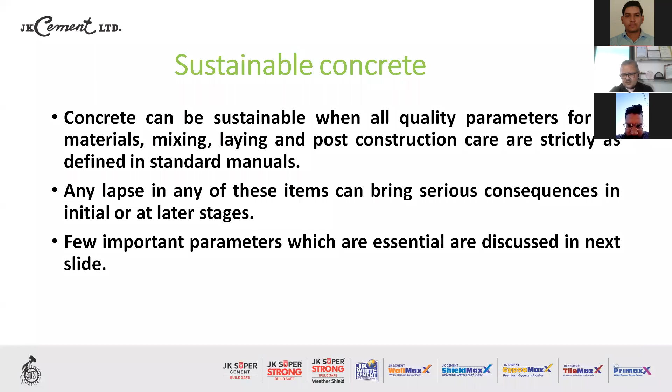What is sustainable concrete? Concrete can be sustainable when all quality factors of material, mixing, and post-construction care are taken care of as per standard manuals. Yes, that's good - that makes good quality concrete. But to make it sustainable, I have a few more points to say. Any lapse in these things normally leads to serious consequences even if the concrete performs well. But what makes concrete sustainable? We have seen construction companies making concrete workable, flowable, with early strength or delayed strength, and a few more things. But are we yet to see the sustainable parameter for that? I think let us move to the next point.

Sustainability comes along with these things: alkalinity of concrete must be maintained for a long time, at least up to its curing period, which is normally for 5 years. Alkalinity must be maintained. Concrete has a pH of 12, so that pH of 12 is essential for concrete to perform throughout its function.

If alkalinity reduces from 12 to 11, 10.5, the damage has started. Protection is going, sustainability is going. So alkalinity must be maintained. That is very, very essential.

Number two, all efforts must be deployed to bring zero porosity. It's not possible, I know. It's difficult. Zero porosity concrete is yet to come. But then zero porosity, it tries to achieve. When the compactness is increased, a very systematic effort will be there to really reduce porosity, to really bring it down to maximum possible below level.

Number three is chloride resistance. Chloride is the biggest enemy of concrete. It has its chemistry of deterioration, chemistry of reacting with ingredients of cement and water and some parts of sand, some parts of coarse aggregates. All these things are very dangerous for concrete. It doesn't give you performance. It reduces the life of concrete. So resistance to chloride must be ensured at wet stage, up to hardening time of concrete, as well as up to hardened stage, 5 years, 10 years down the line, because presence of chloride in concrete even after it hardened is also going to be dangerous.

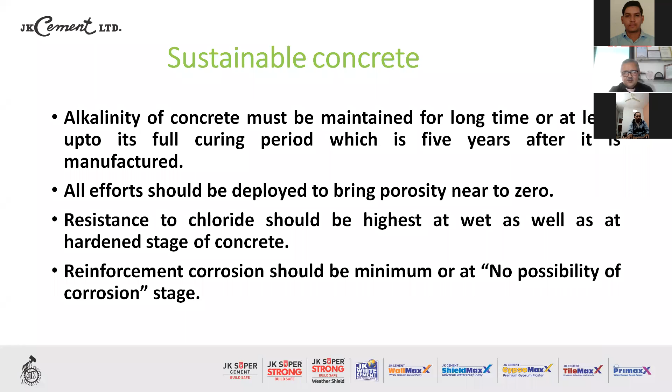These factors impart sustainability, but sustainable concrete survives for a long time. But then there are some factors, external factors, which, in spite of concrete being made with all this alkalinity and porosity and chloride considered, there are some natural factors, external factors, which have a tendency to affect concrete. Concrete has some limitation; they have to be controlled. And for that, we need, for the next step of today's presentation, the protection of concrete. We need to protect concrete from external factors for ensuring that sustainability, ensuring the availability of concrete for this and that.

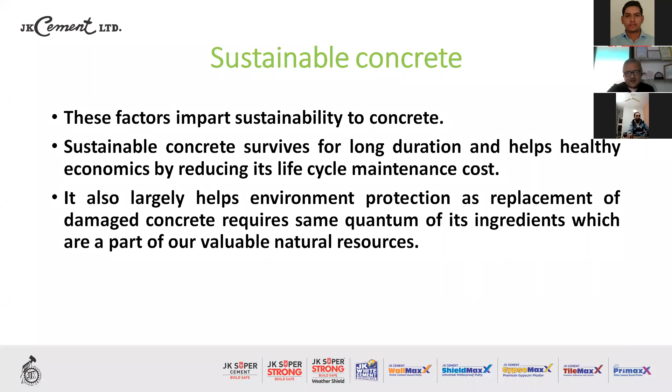These are the factors which can cause the damage. With exponential growth of chemical, petrochemical, pesticides, agrochemical, fertilizer industries, and refineries, there is extreme rise, a steep rise in the use of corrosive environments. Chemicals in these industries are highly corrosive. They have good affinity to cement and they react within the mix of cement. That is very dangerous; they externally corrode concrete. Had concrete been with zero porosity, probably it would have resisted, the skin would have resisted. But then these things have affinity, they have capacity to penetrate the skin, and they go down to the core, and they finally damage it.

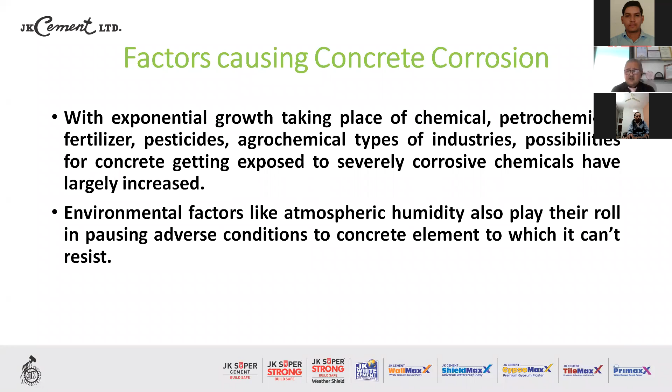And these environmental factors, atmosphere, play a very vital role. It may not be sounding so significant, but the continuous exposure of concrete members to atmospheric humidity can lead to failure of concrete or can lead to damage of concrete.

Third is stagnation. Corrosive liquids, gases, or even solid particles, when they are stagnated over a particular area - it happens sometimes that cleanup is taking time - liquids are there for about 6, 8, 10 hours, or maybe few days. Solid beds are there for few days, gases are there for few days. If they are stagnated over a particular place, they will find the weakest spot in concrete and they will start penetrating concrete and then start corroding it. This is very significant and very applicable in the industry.

Again, I am coming to the chemical industry. They are increasing very rapidly. So there's time, I mean, I'll just go further on that.

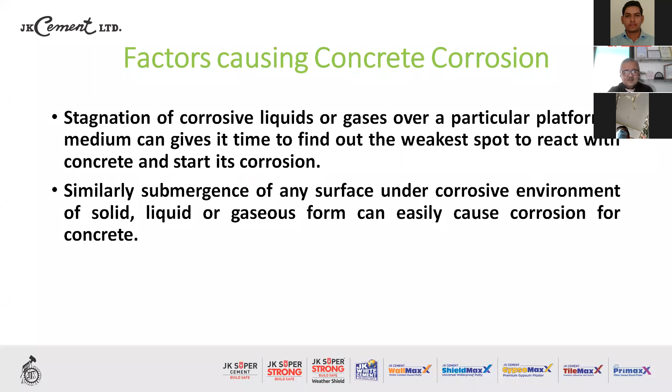So if that happens, what will happen to concrete? Concrete will lose its integrity. It will lose its homogeneity. It will lose strength. It will lose its stability and soundness. The stable member has got long life, but it will lose it.

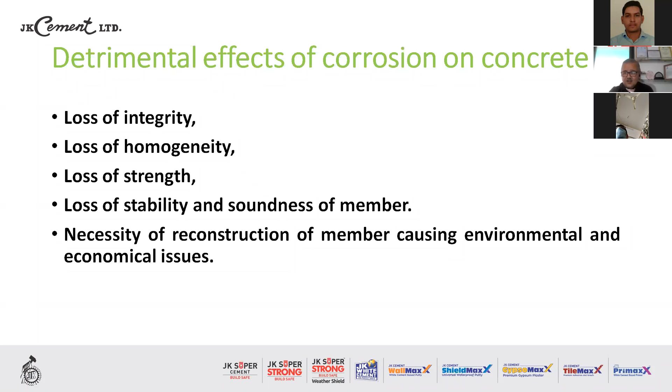It will become necessary for reconstruction. If proper care is not taken at the proper time, with consistent routine maintenance, it will need reconstruction again, causing environmental problems and economic conditions. So we have to ensure these things don't happen. But if concrete is allowed to damage, then these things will happen.

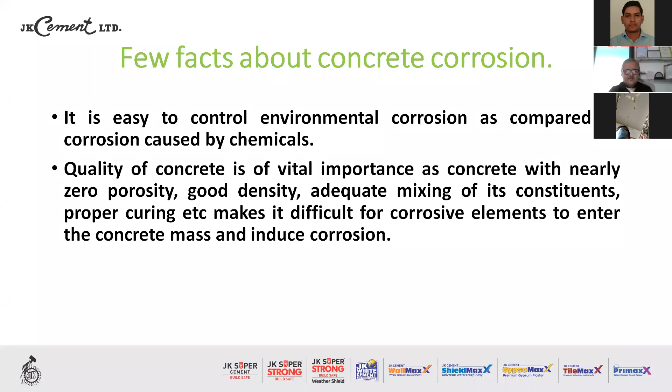Now, if we know that concrete is going to be exposed to corrosive conditions - chemicals, corrosive gases, liquids and solids, and corrosive environment - we need a practical design for an anti-corrosive treatment scheme. How do we decide an anti-corrosive treatment scheme? Probably a normal person may not have come across this type of topic, so I would like to go a bit more slowly for people to understand this.

Selection criteria for materials to resist these conditions: the material should be inert, because ultimately it has to resist acid attack, alkali attack, or chemical attack for concrete. It has to be like a soldier protecting and fighting against the enemy of corrosive chemicals.

The treatment material has to be compatible thermally - expansion and contraction is very important. The concrete is already set, already done, in position. The environment has different expansion contraction under different temperature conditions, so concrete expands and contracts differently. The thermal coefficient of expansion and contraction of the material has to be compatible with concrete - it has to expand and contract with the concrete. When concrete expands differentially and the treatment material expands differently, they will get debonded.

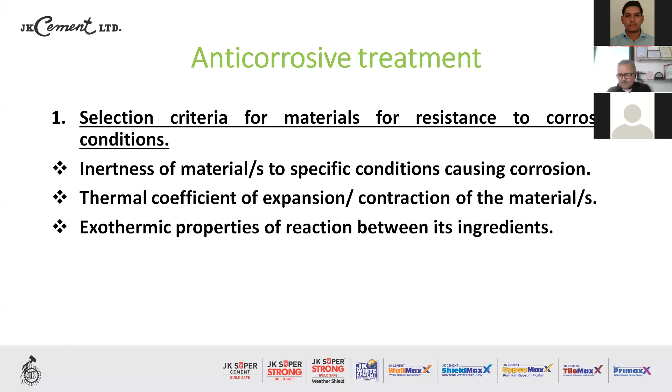Second important thing is compatibility of material - it has to resist a combination of chemicals. You may not end up facing just one chemical; there may be a group of chemicals, a combination of acid or alkali, or both acid and alkali.

So it is most important for the strength of the material, the mortar, and the treatment as a whole - the comprehensive treatment - to resist that particular attack of acid or corrosive liquid in that area.

Economics is very important. It is not necessary that all expensive things will give a good life and inexpensive things give less life. No - it goes with the requirement, the chemical requirement, the property-wise requirement of the material.

And the second thing which I have seen - I have always been interested in these things, and this is useful, very useful for you also to follow - is that life cycle cost is always to be considered.

You may find the treatment is about 10% costly in the initial stage, but if you take a life cycle cost of 5 years, probably that 10% spent early will end up saving repetition after 5 years. The 10% saved early may need repetition of treatment every 2 or 3 years. So in 5 years, you might have repeated twice, whereas the costly thing would have repeated only once. So life cycle cost is very important to consider when selecting treatment. I would like to emphasize that this has to be considered very religiously.

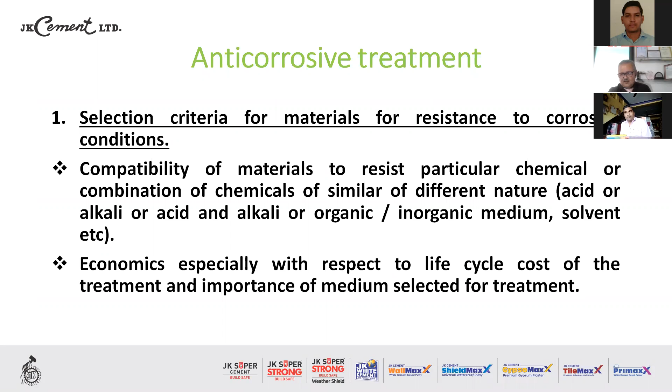Second is what is the nature of acid or alkali? It is said that alkali at high temperature and acid at low concentration are extremely corrosive. So sulfuric acid at 98% versus sulfuric acid at 10% - the 10% sulfuric acid will need more care rather than 98%. Nitric acid is a different case. Alkali at high temperature is a different case. They have to be very selectively examined to determine what is the corrosive value of the corrosive liquid or material to be removed.

So corrosive value is important, that has to be done. Ventilation is very important. I've seen corrosion accelerating because of no ventilation in a particular case. There was a room housing a particular chemical reaction process unit that was not ventilated, and the corrosion rate was very high. I examined the condition and found that the fumes were remaining inside - it was not ventilated. Also, adequate slope was not provided, so stagnation was taking place, as I said earlier. We provided a good slope with effective draining, and corrosion reduced.

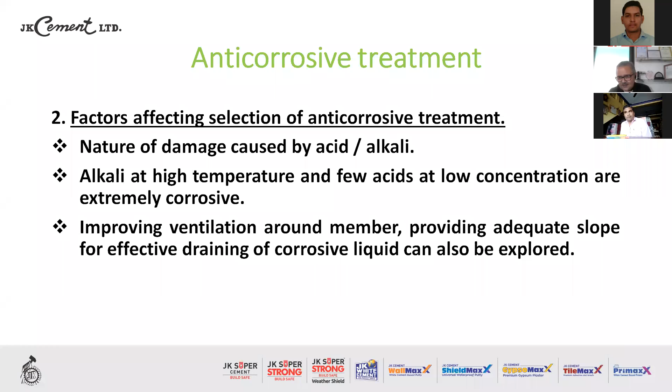There are three basic types of anti-corrosive treatments. The most convenient and widely used method is tile or stone lining laid in a suitable mortar for bedding and jointing. It's similar to what we do in house flooring, but these are a typical type of thing wherein brick or stone is of a particular category, having acid-proofing property and some IS codal provision. They have to meet the codal provision.

Another commonly used method is treatment with site-laid material. It's a premium material, almost a liquid, which is a mix of two, three, or four components. They are mixed in a particular proportion designed by the manufacturer or certified, and laid at site till the job is completed. It is a jointless system.

Third is factory-made sheets - there are hard sheets, so many flexible vinyl types. These are made in factory under particular temperature conditions and quality control, then brought to site and laid in a particular process. It's a process to lay the sheet.

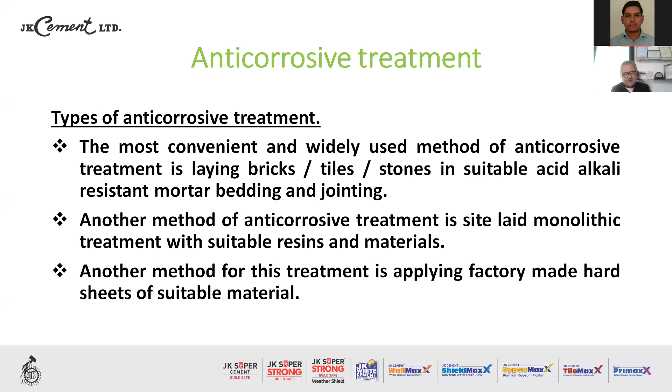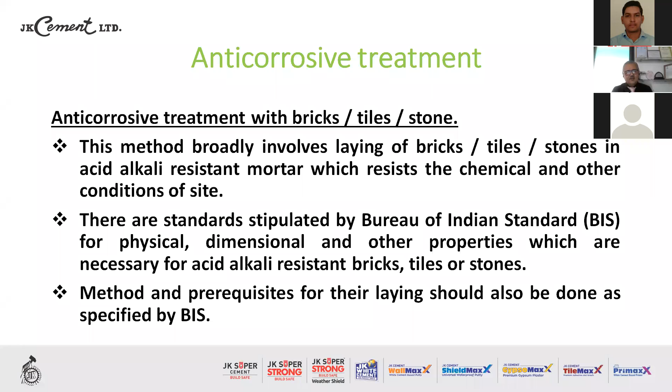Now we go one by one. Acid proofing treatment with tile and stone - this is where bricks, stones, or tiles are laid in whichever way resists the chemical condition. The standards have been prepared by the Bureau of Indian Standards for physical and other properties of bricks or stones. Even the method of laying, how to lay them on a floor, on a drain, or on any vertical surface, are all specified in BIS, so that should be followed.

Surface preparation is very important. It has to be done on a very particular surface - you cannot do it with any surface. Humidity should be considered, the surface should be dry and clean, sound and safe, and should not have any defects. There are many do's and don'ts for surface preparation because that is most important. Only a sound, properly prepared surface will receive the anti-corrosion treatment well and support its performance for a long time.

Selection of mortar is important. As I said earlier, the mortar needs to be considered for heat generation. If the mortar consists of resinous things, it will generate exothermic heat, so that is very important and must be properly taken care of.

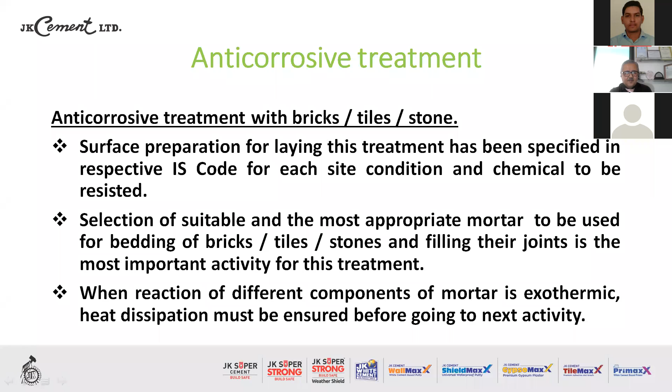This particular treatment is definitely advantageous for stubbornness - ease of laying, less cost of inventory carrying cost, economical treatment. It has a lot of advantages. The most disadvantage for this treatment is on joints. Suppose if we want jointless area, then this treatment will not be useful.

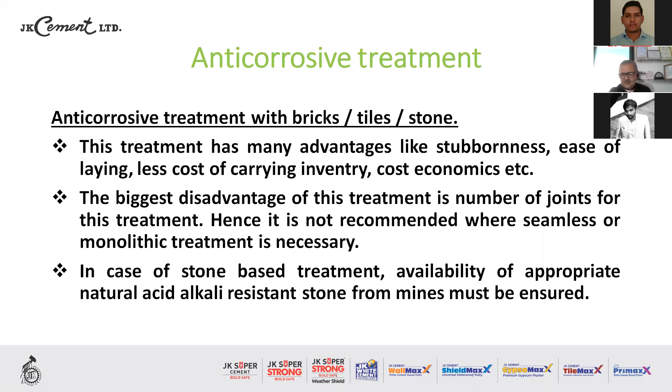In case of stone, a natural material available from mines, there are a few stones specifically having acid-proofing property. The source must be examined very precautiously because nowadays, if I talk about 20 years back, they were getting good stones highly resistant to acid, even severe conditions. But these days they are not producing those category of stones. So selection of stone is very important, and the mine source must be very selectively used.

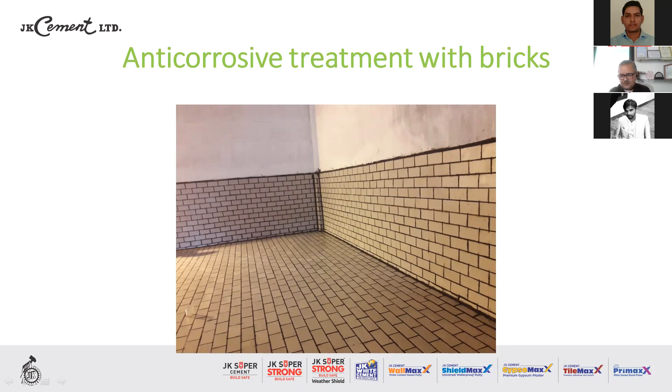Then site laid lining, as I said, resinous linings are there - resin, resin hardener, catalyst, accelerator. As per the requirement of the site condition, this lining is prepared. Basic resins for this lining are polyester, epoxy, vinyl ester, and their derivatives. They can be modified epoxies, modified at nano level according to the chemical resistance required of the scheme, and that lining can be laid.

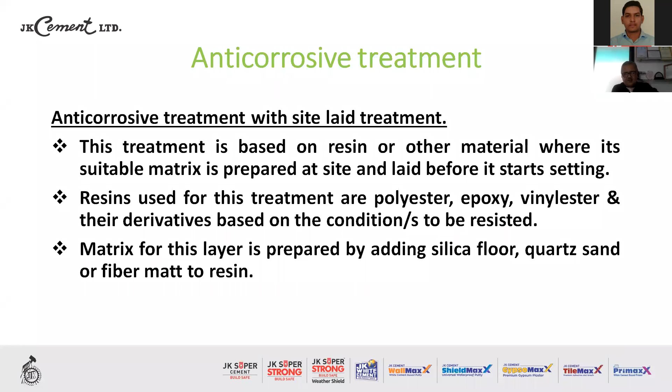Seamless lining is most important. The thickness - suppose if we want a thick line, it will give you 1mm, 2mm thickness with solventless resin. Thickness can be increased using silica flour or quartz or fiber mat to reinforce the lining. This is important.

The advantage of this is jointless lining. It functions very well, but the decision to be taken is it should be without any break, or break systematically. Maybe when we cast a slab, we give a joint. If required, a joint is given around a beam so that load transfer is not affected. These materials have expansion contraction properties in a very different way, so they have to be systematically designed. If a break is needed, it has a systematic design and plan.

Exothermic heat, as I said earlier, is very important because when they are mixed, at that point itself it starts emitting heat. So that heat compensation is very important and has to be managed properly.

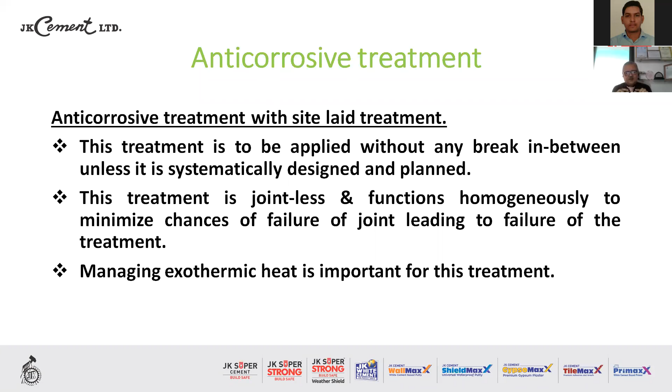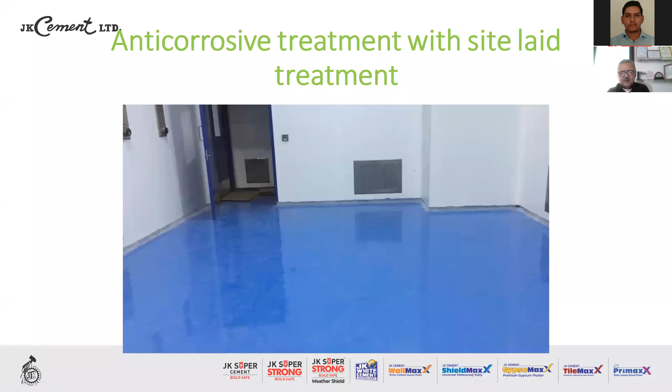This is site laid resin, and I am showing next - resin mixed with hardener. This is a clean room, a laboratory room, wherein you needed seamless lining, so this was done in that area. Second is the same epoxy lining done in an effluent carrying tank, effluent storage tank, wherein effluent was to be stored, and this concrete surface was not capable enough to resist those chemicals. This is the thick lining.

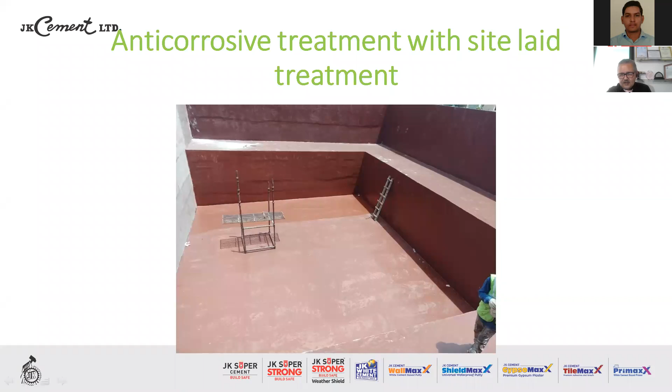This is how it is laid - the person is putting that resin and then spreading it. So this is how it is laid.

Third is sheet lining, I will not talk much about it. The sheets are manufactured in factory as per the instructions, everything as per requirement. They are brought to site and laid at site. The joint is very important - perfect adhesion has to be there because again the expansion contraction factor comes into play. Sheets have a tendency to lift up instead of staying steady, so for that, adhesion is very important. There is a systematic method laid down in BIS, specific IS code, that should be followed. The code which I have written for PPGL, adhesion is very important, and a similar way should be done.

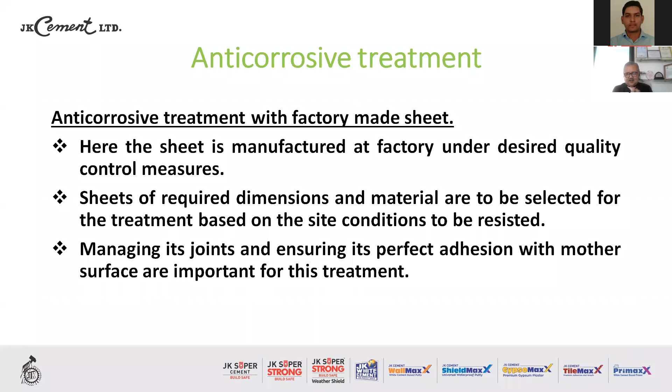We can talk at length about this some other time, but it is enough for this presentation.

In spite of all protection measures, in spite of all care, sustainable concrete, in spite of all these things, concrete got damaged - suppose concrete did not perform, it failed somewhere because of mechanical failure or some other failure. Then the concrete member has to be available till its functional life, so care has to be taken.

The next topic is protection to cure. What is cure? I don't mean cure by curing with water. I mean rehabilitate the damaged member. So the damaged member has to be rehabilitated properly. Now protection is over - unfortunately, if protection did not work and concrete failed from somewhere, how to rehabilitate?

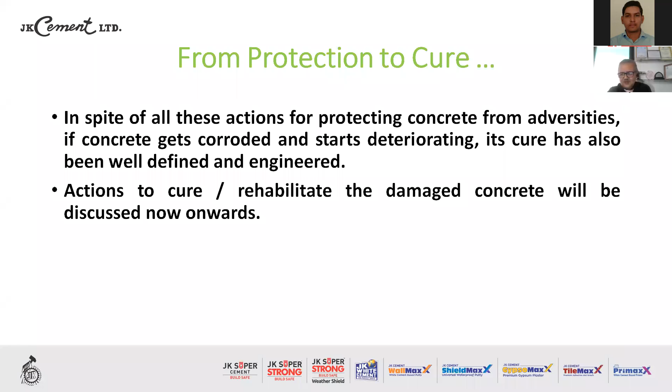We all must have undergone this if we have malaria or fever or some other sickness. What will the doctor say? No, only Hb will not work - let's go for ESR, let's go for WBC, let's go for RBC, let's go for SGPT, for a comprehensive view. I think Hb is okay, ESR is not okay, so I think you have some infection. No, WB is okay. He'll do a comprehensive evaluation of that blood, he'll also do reports side by side, he'll also do sputum and stool reports.

So many things, right? Similarly, damaged concrete has to be comprehensively evaluated. There are many methods available - NDT and destructive methods available to assess and find out the values of damage. You'll get values like 2.5 and 5.3, but they have to be correlated, and comprehensive analysis of NDT results is very, very important. I'll insist on that.

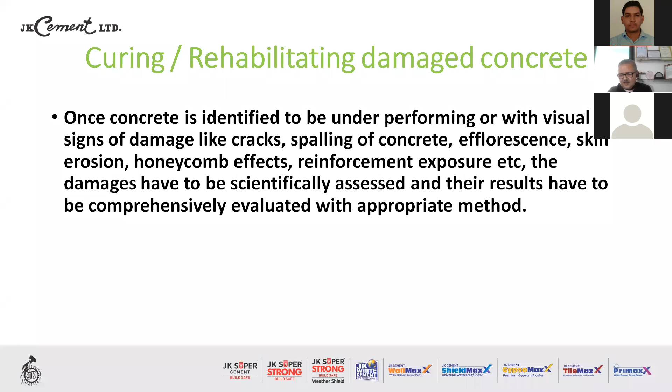When damaged concrete is to be tested, NDT methods are preferred over destructive methods, mainly because the concrete is already damaged. You go for core cutting, chiseling, and take it down for sampling - I think we avoid it as far as possible. You should try to restrict to NDT methods just to reach whatever strength is within.

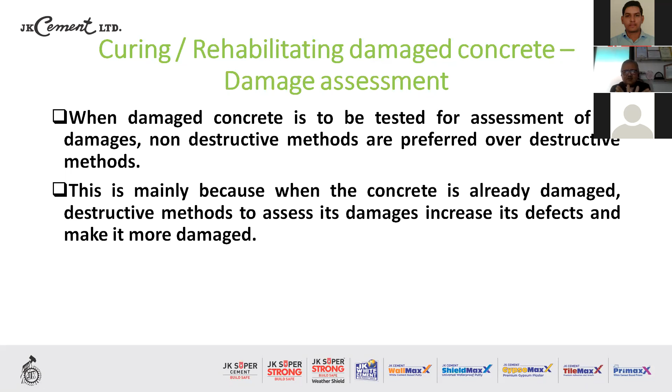These are a few NDT methods - rebound hammer test, we all must know all these things. Rebound hammer test, USPV test, ultrasonic pulse velocity, carbonation test, half-cell potentiometer test, chemical analysis test. There are a few, but they are done in a very precise way. These are commonly used tests for evaluating underperforming concrete structures, right?

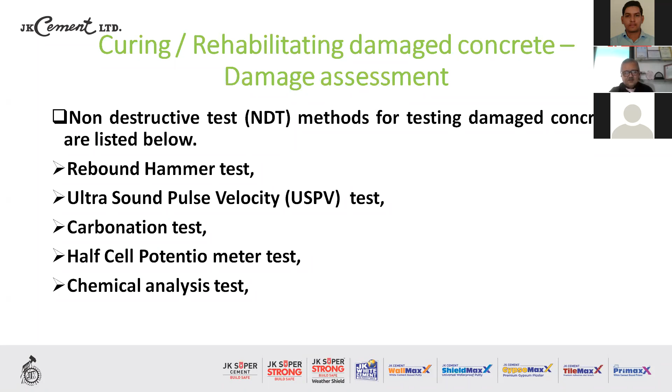As I said earlier, results need comprehensive analysis. You cannot just rely on one test and diagnose that this is bad because of X and Y. USPV has to be done, carbonation has to be done, potentiometer for reinforcement has to be done - all these have to be comprehensive.

Here, if the rebound hammer test is good but USPV is bad, what to do? Rebound hammer will give you an idea about the skin of concrete. Ultrasonic will give you an idea of the core of it. So skin is good in this case, but core is bad. Probably that was due to poor construction practices, or maybe some chemical things, or some other reasons.

The treatment for rehabilitating the member will be different in this case. If both were bad, the treatment would have been different. If both are good and some third thing happened, it would be different again. So you cannot just rely on rebound hammer test or USPV test or carbonation test alone.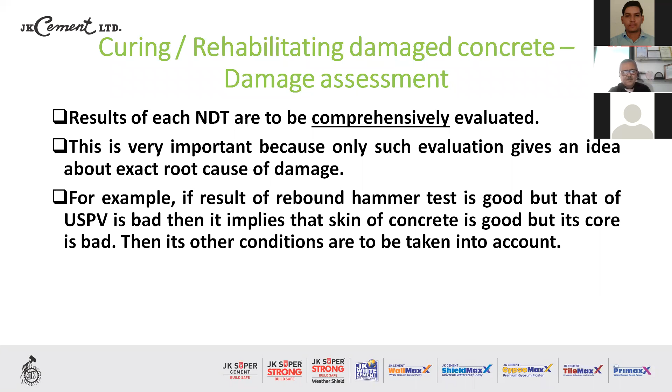It is essential and mandatory that the test of the structure should be properly identified. Yes, it is very important.

If we go for chemical effects, there is some effect on the concrete in the chemical area. Treating the skin may not be adequate, may not be enough. The core has to be tested, and if the core is bad, then injection grouting - anyway, we'll come to that later on.

In which condition has the member been damaged? In which condition did the member lose its strength and durability? Those conditions have to guide the selection of NDT. That is very important.

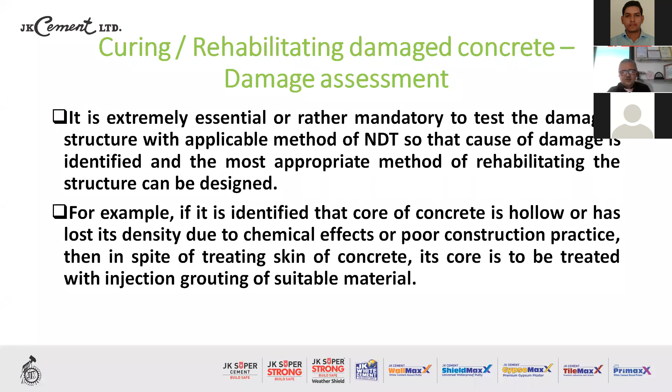NDT has got a huge bearing. NDT has to be done very systematically, scientifically selected, and that is how it will give you an idea about the structural rehabilitation scheme, and correct results have to be taken so that the structure doesn't get damaged again from the same root cause. NDT analysis gives an idea of the root cause of damage - we want to arrive at the root cause of damage.

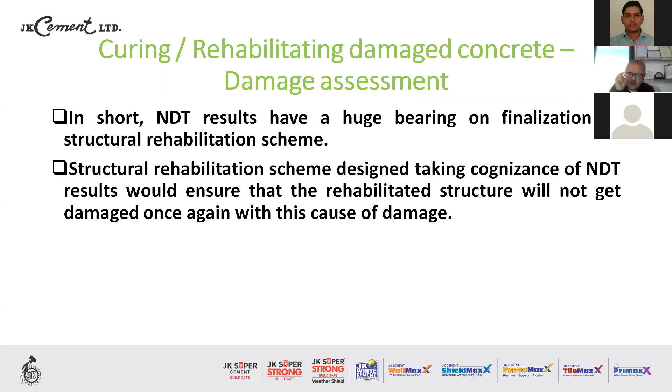It was chemical, bad construction practice, some external effect, rigidity, reinforcement, or poor ingredients - there may be n number of reasons. But with comprehensive analysis, you get the root cause, and that will give you an idea about how to systematically design the structure, right?

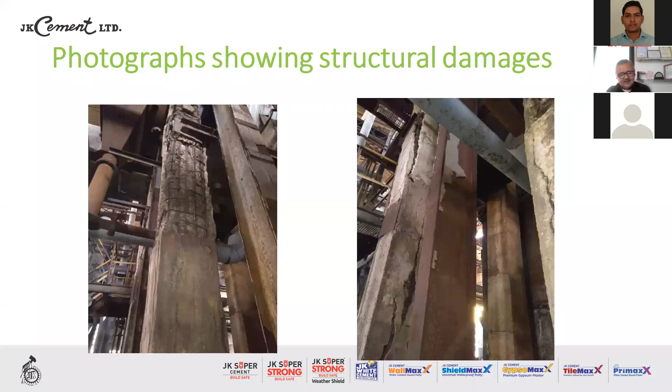But you can see what extent of damage can happen. On the left side, the reinforcement bars have been opened out, skin has gone. On the right side, the columns have cracked, and the skin is going away, core concrete is going away. I don't know about the core concrete - NDT was done, core concrete was also found bad.

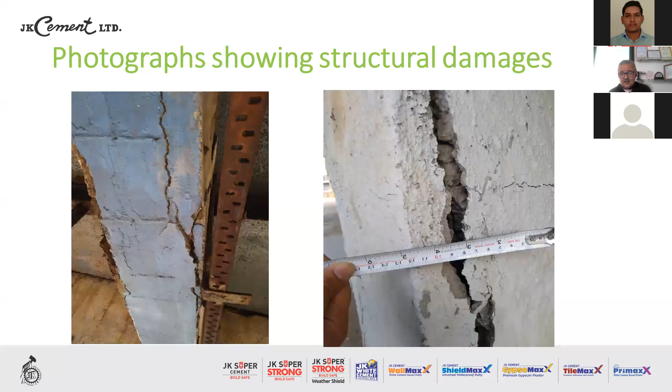You can see this is a column base. You can see the crack pattern, the crack pattern on the left is a crack. It shows that there might have been some ingress, some construction material on the skin also has eroded. On the right side you can see the dimension. It is absolutely unhealthy condition for any concrete.

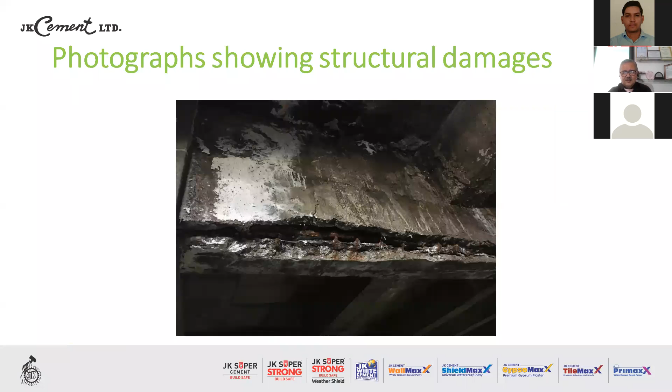Can you see the cover portion below the reinforcement? It has gone. It has very badly affected this area in a chemical industry, really serious.

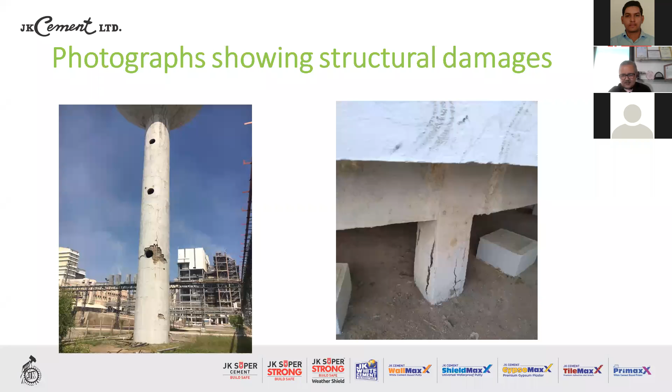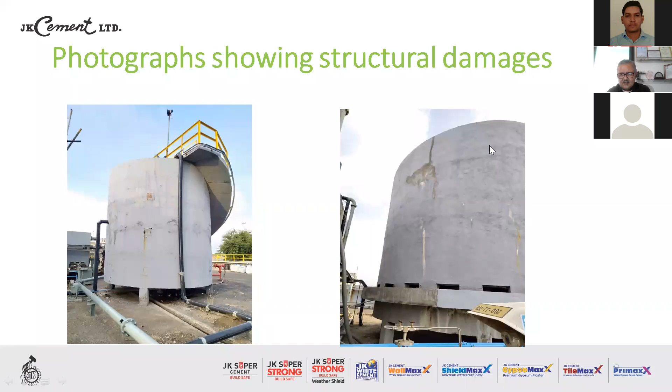You can see here, see here, all these things. These are all weak points in this particular tank.

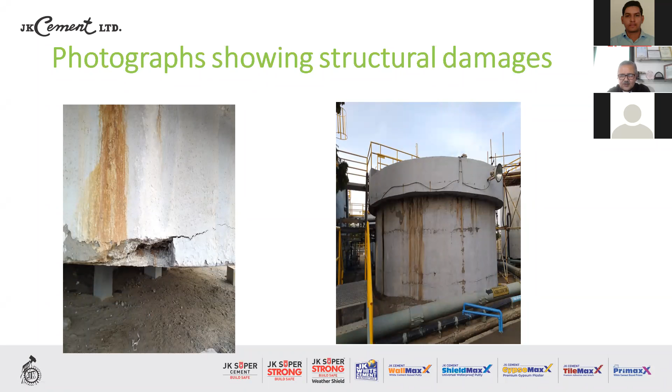Here on the left side is concrete failure at the bottom. On the right side again, effluent is coming from this joint - this is an effluent storage tank. Effluent is coming from this joint, and you can imagine what will be happening at this point. I don't know what the condition of this particular area will be when you empty out the tank and open it out.

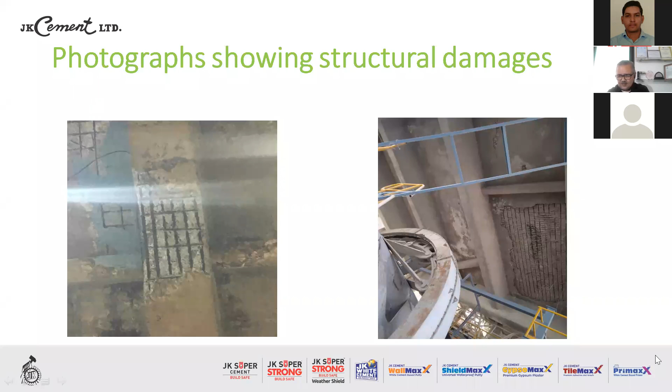It's a real picture, it is not animated, but you will be able to see this picture.

Are you shocked? This reinforcement bar's diameter was 25 millimeters, and you can see how much it has reduced. Above this is a filter in a chemical industry, a bag filter, and the filter is running. I won't be able to name the chemical because it's not permitted, but this chemical has more corrosive value than explosive value. That corrosion has spoiled and removed the beam, and the equipment is running on that.

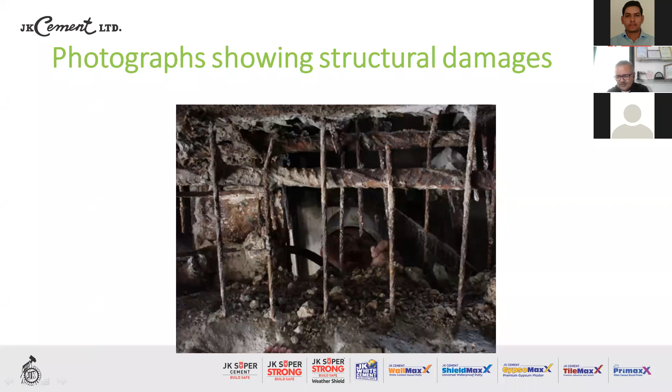So these are a few of the damages. Structural steel is part of this topic too, and I wanted to show you photographs of how bad it can also be affected.

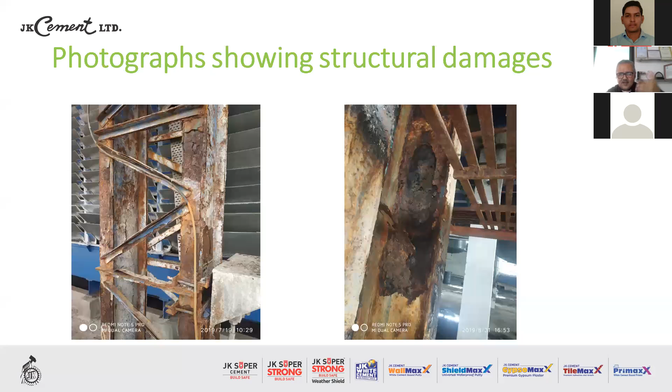You can see these particulars, can you see this? This is the real damage caused to a structural steel member column, and this is under load. You can see this column, how bad it has gone. Even the top skin has gone - not only painting, painting has gone, but even a few layers of steel have gone.

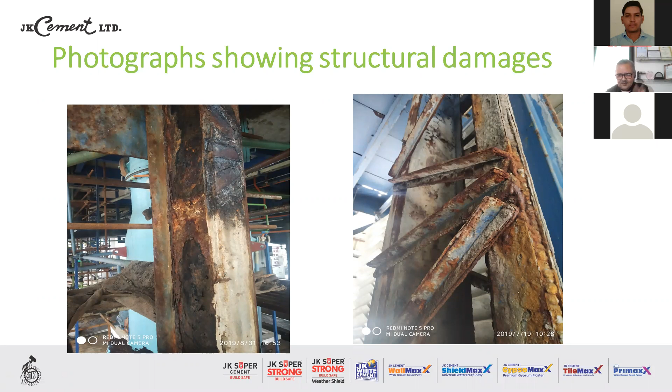So now let us come to basic principle - how to rehabilitate. I have to go a bit fast now. These are a few important principles on which we have to base the rehab scheme.

Mass for rehab has to be identical like the mother structure. Thermal behavior and density of fresh mass and material should match - if mother structure is weak and fresh mass is high density, or the other way, that will not be compatible. That scheme will not last for a long time.

New mass should not become just a patch. This is very important - people say 'put a patch here, put a patch there,' but that patch will not work. The patch mass load has to go right up to the bottom, right up to the foundation, because the mother structure is already weak. Now you are putting some extra burden on it and expecting the reinforcement or the remaining structure to take the load. So it has to go on the foundation.

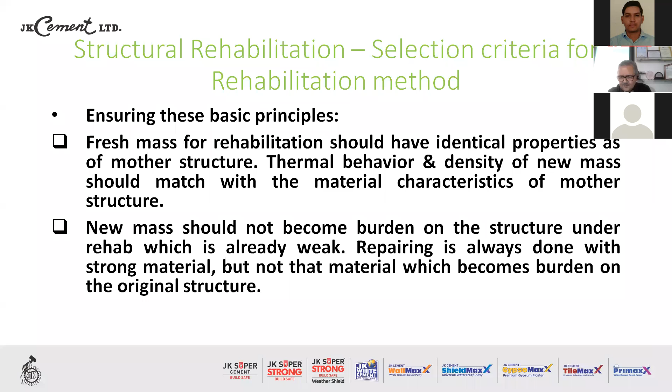That's what I suggest to go with. High density rehab can minimize surface porosity, but it should not be so high that it affects the structure of the original area.

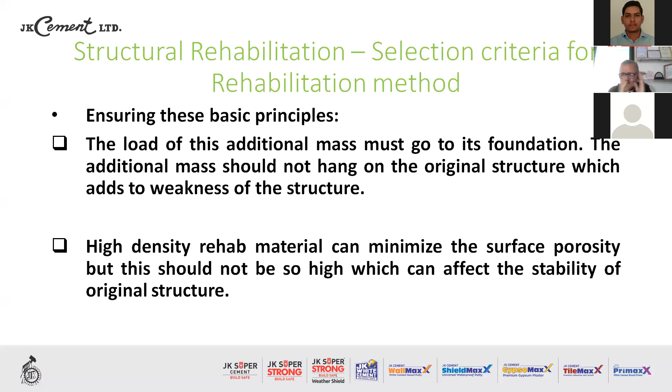Selection of material - material has to be selectively used for this. They should be compatible with physical properties and chemical compatibility, because if the damage was due to chemical environment or chemical effects, then it has to be chemically compatible too. The external surface environment also has to be considered.

Exothermic reaction - I have always insisted on exothermic reaction and exothermic behavior, because I have seen that effect throughout my career. It has been an ignored area, but that exothermic thing cannot be forgotten. Its pot-life, consumption pattern, all these things are very important criteria for selection of any subsequent chemical.

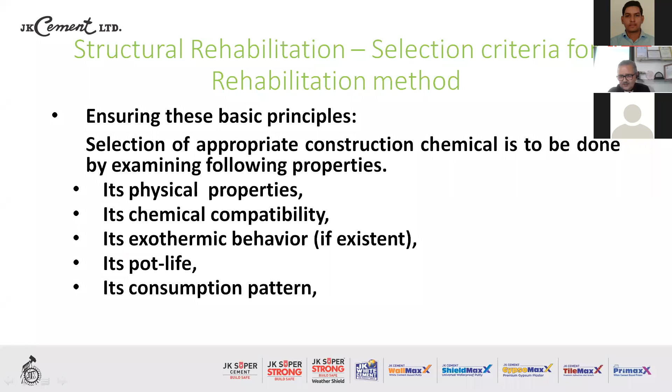High pressure injections are definitely very good, but they have to be done critically. Why? Because if they are not done under calculated pressure - if your pressure is high, they'll aggravate internal crevices in the structure. If it is low, they will not travel to crevices and will stop in between and just set, leaving the crevices unattended. So crevices should be finally filled up.

High pressure injection system has to be holistically calculated - pressure has to be calculated, viscosity has to be calculated, the crevice area has to be calculated, so that with the UPV test and other tests, it becomes a systematic thing.

Structure protected externally - we have seen earlier that protection is important. You may repair a structure with high grade material, high grade system, but if you cannot protect it externally, you made it strong internally, but externally also it has to be equally protected. Let it be sacrificial coating, repeated every 2 years or 1 year, but it must be protected so that the repair performs in the environment where it is desired to perform.

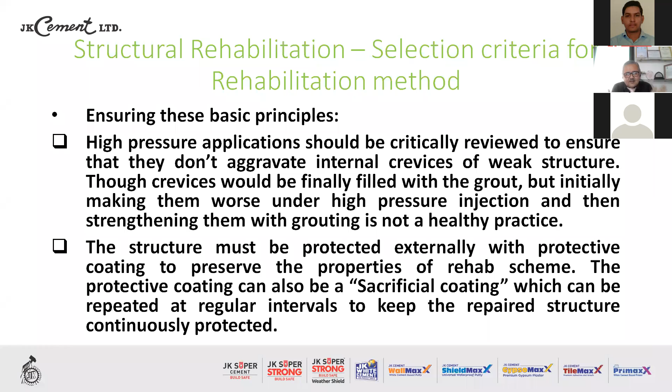Safety is most important. The scheme must be very safe.

I have seen one of the accident sites - I was involved in that site. The accident took place, a portal structure got damaged. The portal structure was so bad that the top members had to be dismantled. As the structure was damaged and we could not continue with the portal structure, we had to make it a simply supported structure. So again, working at height came into picture, and again safety came into picture. That is very important.

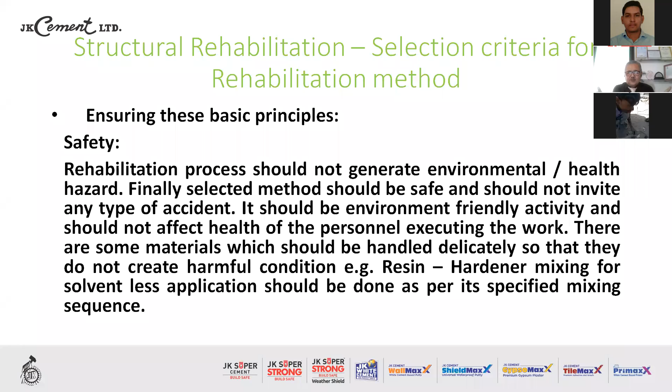As I said, safety is also like resin-hardener mixing ratio sequence - very important. The resin has to be there first and hardener has to be put inside. It should not be hardener poured into resin. If you do that, there will be an explosion. So safety is most important and must be ensured properly.

Stability is very important - you are repairing a member and the adjoining member should not be affected. It should be taken care that while taking a member for repair, if you ignorantly take away support of the adjoining member, you are inviting one more collapse, imposing instability. So these sensitivities have to be very carefully examined before finalizing and making the rehab scheme.

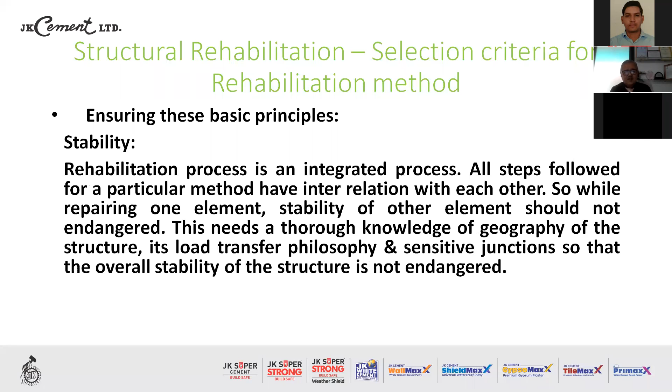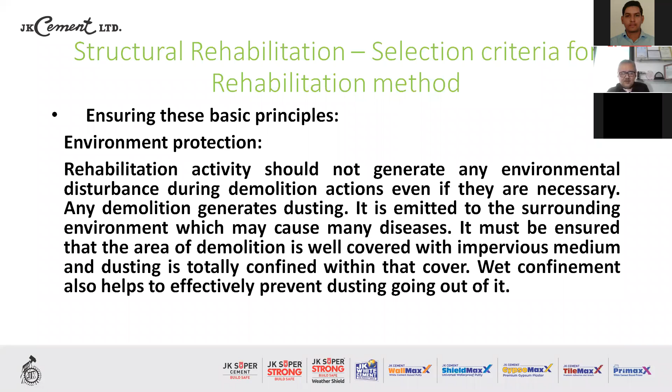Every rehab activity generates dust because there is demolition and chipping involved, and some debris will be generated. So those have to be systematically managed - environment should not get affected, and if the debris or chipping material carries chemicals, they have to be more systematically disposed so that pollution problems do not happen. You are trying to rehabilitate something, not at the cost of the environment.

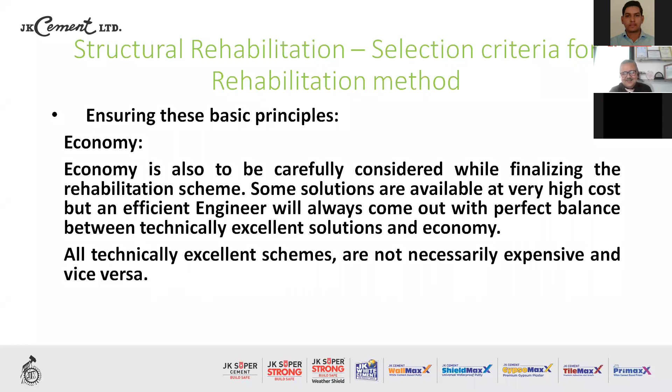Economy is important. Ultimately everything comes down to budgeting. As I said before, all technically excellent schemes are not necessarily expensive, and vice versa. These days schemes are available like fiber, laminates, and many other things. People go for these, but sometimes grouting itself would have worked instead of fiber. So economy has to be considered.

Use of available resources must be so selectively planned that they remain available right through a scheme. Suppose you are rehabilitating a commercial or industrial complex where you need 500 bags of repair mass, and you find only 300 bags are available right now. Then you are stuck, with no substitute for the remaining 200 bags. So you must ensure that locally available material is preferred and under your control. Use of available resources must be explored.

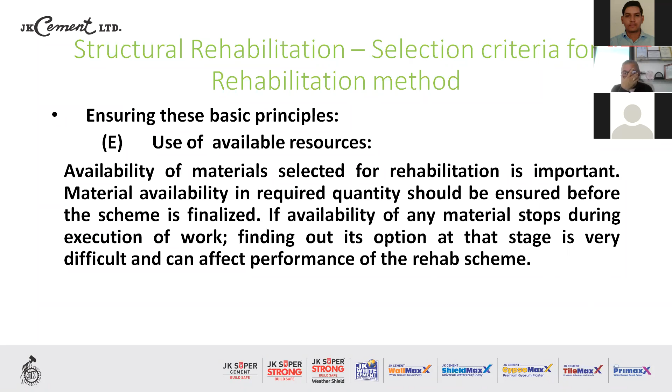That's all from me. Concrete is a delicate material that's handled with love and care, and I hope I tried my best to share my applied knowledge. I hope it will be useful at one or the other stage of your professional career. Let us be a soldier to protect it. Concrete is a very important, delicate material, to be handled with love and care. That's all I had to say.

Before I end, as I do normally, we'll have the national anthem. I'll stand up from my chair. I'll expect you to please stand up, and join me with the national anthem.